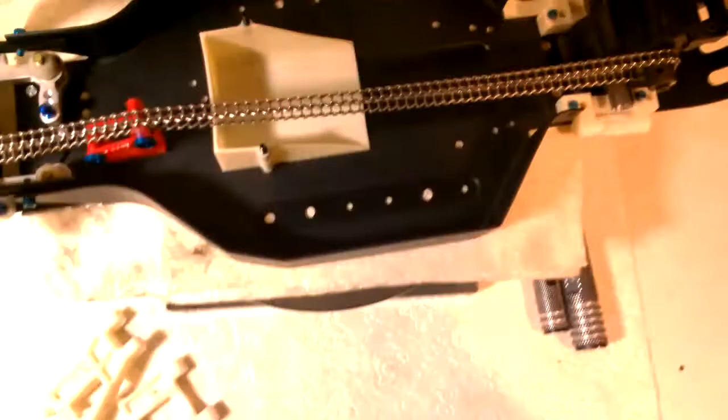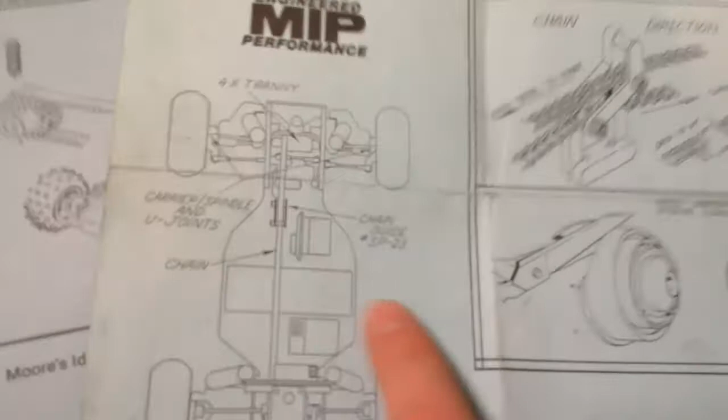In the original instructions, what it recommended doing is you put this chain guide here, it's like a tensioner, and you would end up running the battery widthwise across the chassis and then mounting the servo back over here. I had already done something kind of like this with my 410 Legend project.

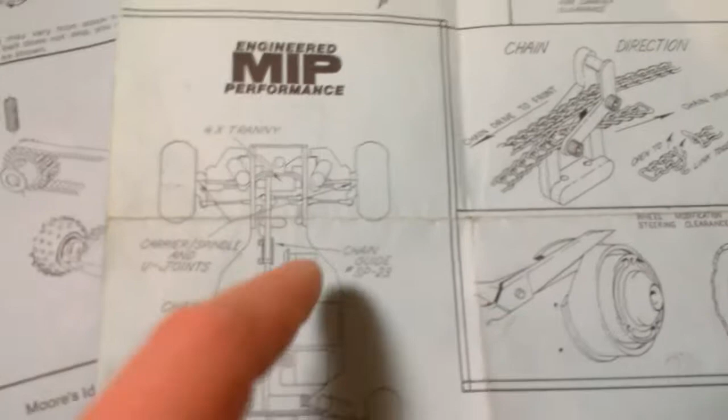So I wanted to do something different, and I wanted to try to run the battery in the original stick pack configuration. But in order to do that, you actually have to use this tensioner a little bit differently.

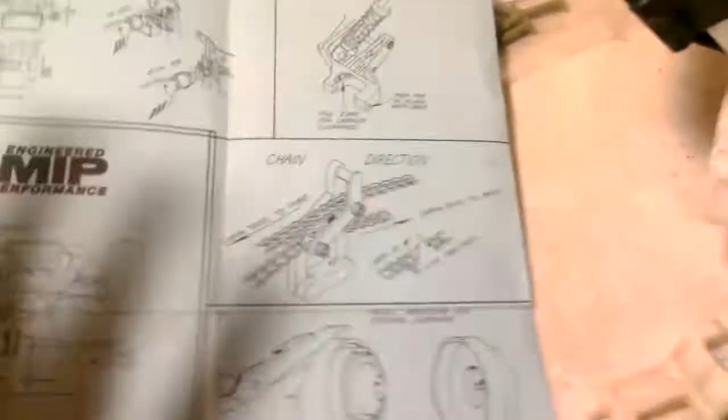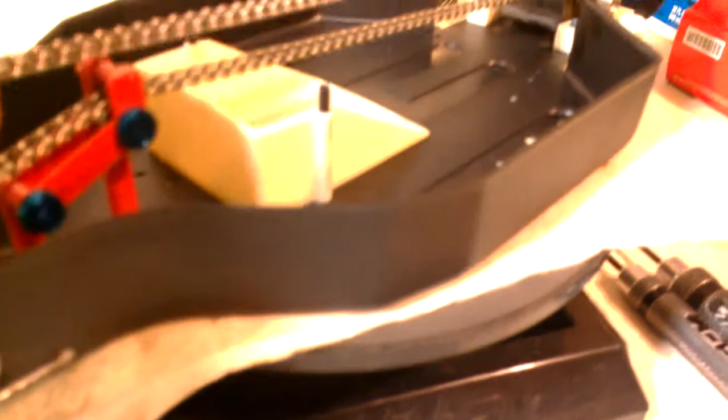Normally you would run the chain guide, call it tensioner, whatever you want, such that the chain itself goes, the bottom piece goes over this piece here and then under this top piece. The top piece here threads in between this top bearing and basically where this bottom piece is going right now. This top piece would otherwise go in, and then the bottom piece would go under that bearing on this guy here.

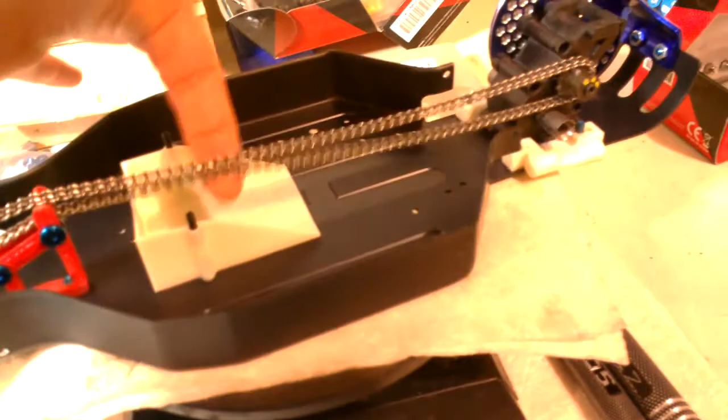But I moved these basically one notch up, so the top piece is on top and the bottom piece is on this top bearing, so that way I can lift up the bottom of the chain so that I can basically have enough clearance to run a stick pack configuration.

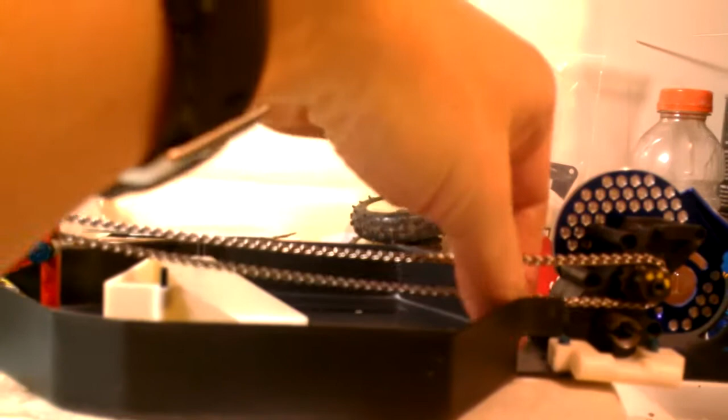And by the time I mount the bulkhead, for example, this will ride up a little bit, so I'd have clearance. I had two reasons for doing that.

One is that I did want to try something different from the original setup, but also I do have this nice MIP battery plate, and I want to be able to use it for one of my four-wheel drive projects. And since I couldn't use it on my Legend project, I want to try to use it here.

Which means running it this way. Now this does create some problems because there's basically now nowhere to put the servo. There's very little space here with the way the steering rack mounts. You do have to mount it back, and at full throw, it runs against these mounting holes.

So I can't quite put the servo here, can't really put it here. I was thinking maybe I could get a low profile servo and cut out the mounting arms and maybe tape it in, or maybe I can run it in a stand-up configuration over here. Maybe there's a way to actually make it work. So I'll play around with that and see what works best.

So that's sort of kind of where that is right now. Let's see, I think there was something I wanted to mention.

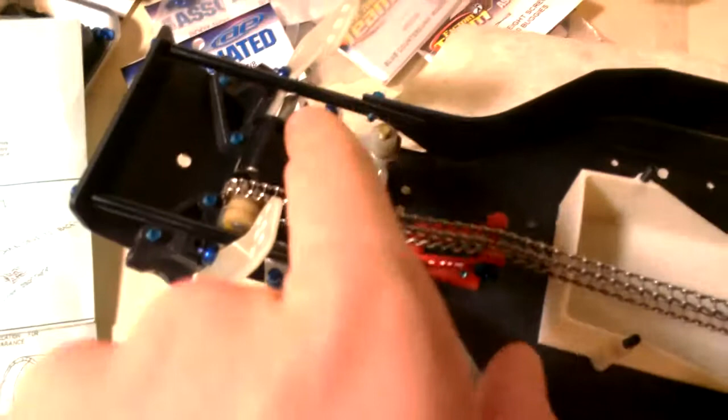You'll notice I am using the factory team blue aluminum screws and ball studs and nuts. I just did that to provide some kind of newish sort of look, a nice little blue accent to it.

One thing to point out, though, is that the blue aluminum screws, these guys here, are really soft. So if you actually do this, it's worth taking just some other screw, like a beater screw, for example, an 832 thread, and pre-tapping all of the holes before you actually thread these blue screws in. Because the head here is so soft, when you screw it in with your Phillips head screwdriver, it can actually distort the Phillips openings here, and it can look really monkey. So pre-tap all the holes first and then run this.

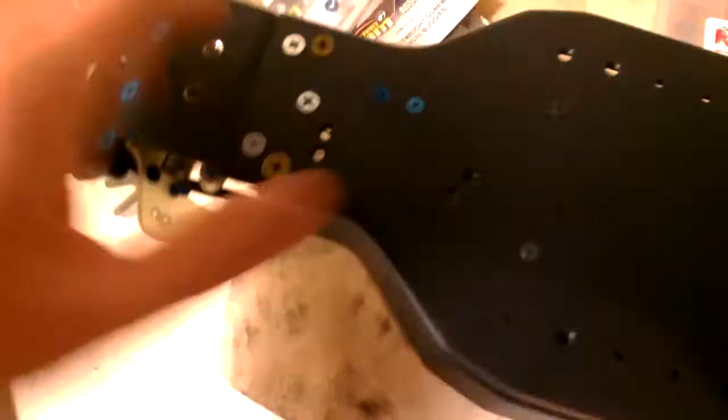Another thing to note, I had mentioned in the first video that I wanted to run my orange chassis with this, but because I had to drill holes for the tensioner, and I also did end up having to drill new holes for the steering rack, I decided to use just a re-released World's Car chassis for that. So it turns out that the front gearbox is a bit fatter than the 410 Legend gearbox.

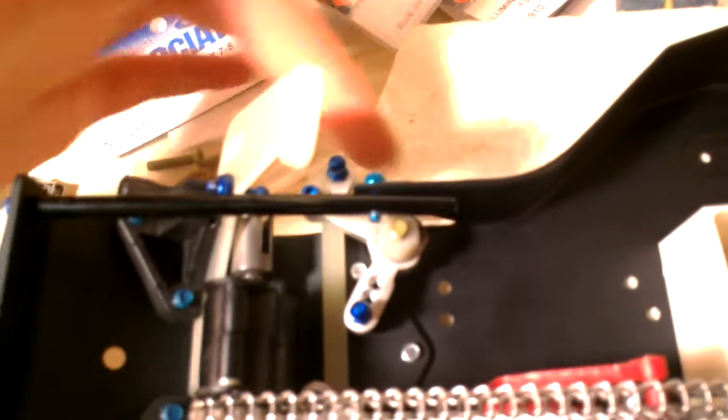In order to make space for that, you have to pull the steering rack back. The MIP 410 Legend steering rack didn't quite have short enough arms to fit that shorter rack with the stock mounting holes. So you have to drill these holes a little further back, and drill them out. And in order to account for the steering rack throw, you have to drill out or grind out this sort of triangular opening on either side, to let the actual arms from the steering rack throw all the way without hitting the chassis.

Now as a result of that, if you're going to use a newer front nose plate, this is a re-released front nose plate. Some of you may be able to tell the AE logo here doesn't have the curved typography that the vintage nose plate has, so this is a newer nose plate. The newer nose plates are already cut triangularly, they don't have a square or rectangular cut.

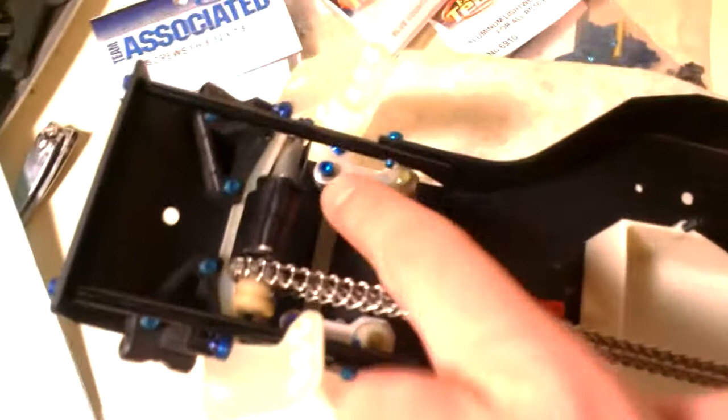What that means is with the older nose, let's see if I can find an example. So with the older nose, it would be perfectly square like this, and you would actually drill these two holes through both the chassis and the nose. But because this nose already has a V cut in it, you're only drilling these two holes through the chassis, and the new nose kind of gets around that.

So in order to mount the nose, you still have to use the 3 older mounting points, but you need to use shorter screws to clear the steering rack. You use the 832 by 1/4 inch flathead screws, part number 6931. You just use 3 of those, and that'll mount the nose just fine.

And then you just play games with using little spacers under the steering rack to lift everything up so that you clear the screws, and so that this cross brace here also clears the chassis. There's no rubbing or grinding or anything. What's interesting about this cross brace is that it doesn't pivot on bearings, it actually pivots on the threads of the screws.

So you screw in, say, this screw through the aluminum steering arm, and then it screws into this fiberglass piece here, and it just screws in and unscrews out as this thing sort of rotates around. So you have to make the spacing between the fiberglass piece and the aluminum piece just right, so there's not significant amounts of binding as this steering rack throws left and right.

One thing I also had to do with the length of screw I used here is put a small, I think it's a 1mm spacer on the top between the screw head and the steering rack, just to make sure that the bottom thread doesn't run into the chassis. It actually clears the nose plate here. This all seems to work okay, no problems. The actual screw head itself also does not run into the chassis.

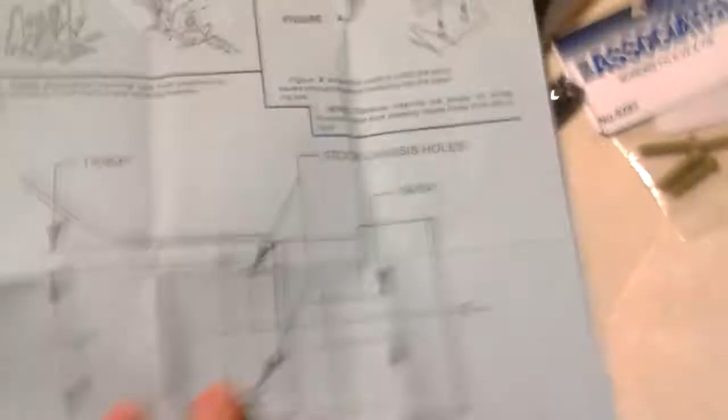This is an original front shock tower. It's just making sure you get your measurements right, especially with these bottom holes, because what you get is a template, and this is printed 1-to-1, so you could in theory just put this over the chassis and mark the holes. But the problem is you can't see through this, so you could maybe get some see-through kind of paper, or decal paper or something.

But I tried to do it with just normal white paper here up against the light, to mark off all the points. And then what I did is I put some masking tape onto the chassis, and I tried to make sure I got the holes lined up, because I can kind of see through this white paper. And then secure the paper against the chassis, and just poke holes through the mounting point positions and make sure everything's right.

And I'd make markings in the masking tape with a pencil, and then take the paper off, and I would just measure where those pencil markings were to make sure it's all symmetric. I didn't get it completely perfect on this side, I had to actually drill 2 holes, but I drilled small holes, so that way it kind of worked out.

I could just use my... whatever you call this, I forgot the name for this, but this is what you use to make angled cuts in the holes. It just kind of bored out those two small holes into one big hole with the countersinks in them. That's what it is, it's a countersink.

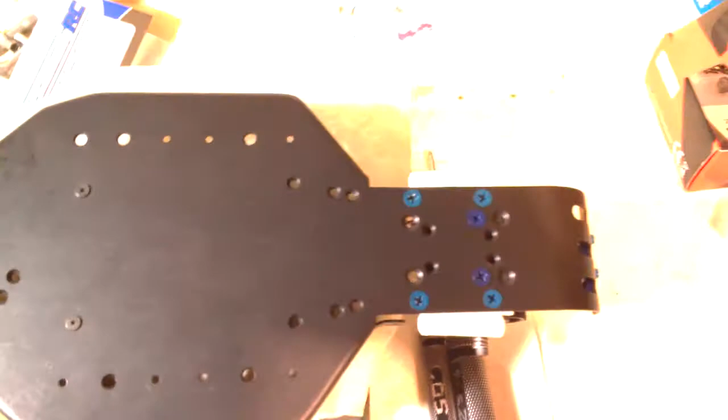The MIP gearbox that I'm using in the rear mounts using two screws, two 8-32 screws. It does not use the 4-40 screws. It's only two of these guys, and it doesn't use the standard length screw.

I think this is like a 3/8 inch screw. It uses, I think, a 1/4 inch - these two, I think, are 1/4 inch screws. Otherwise, if you try to thread a 3/8 inch screw in, it'll just get caught, and you won't be able to thread it all the way in.

And I actually sort of ruined two nice aluminum blue 8-32 thread screws that way. So then I had to go to a shorter screw to make this all work, so that's fine. Let's see, is there anything else I want to mention here? I think that more or less covers where I am right now.

Again, when the bulkhead comes in, I'll drill the hole through that, mount the chain through it. Then I'll work on the rear shock tower, and I'll work on the arms and everything.

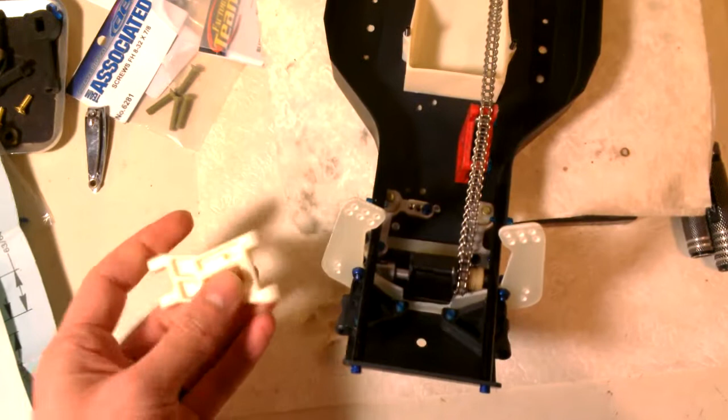One thing that might get a little tricky is the CVDs, and the reason for that is the chain drive kit did come with a pair of universals that were meant for the short arm RC10. Now I don't have those universals, and that's okay because I don't intend on running a short arm front. I intend on running the standard long arm front that you would find on a team car or a world's car.

But now I have to make sure that I have the right CVD for that. So I do have from my 410 Legend, if I go in here, I have these guys, these longer CVD dog bones that were meant for the long front arm kit. So I'm going to try to use these.

But the problem I have now is that between the left and right ends, one of the wheel axles is actually a B4 wheel axle that the previous owner put on. I only have one wheel axle that was original from the 410 Legend kit. So I have to play around and find CVD wheel axles that will fit in this assembly.

I did see some Associated TC3 CVD wheel axles that might be just the right size. I ordered those the other day, so we'll see how they fit. If they fit, then I'll just use this assembly. I won't try to play any games with using a different caster block and a different steering block like what I did with the 410 Legend.

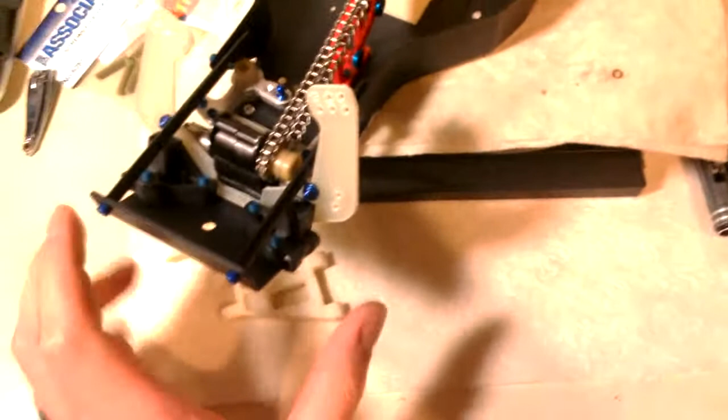I want to use the original MIP parts for this particular project here. So the front will hopefully not be a big deal if those TC3 units actually work.

If not, then I have to try a little harder and find another solution. For the rear, I'll probably keep it simple and just use standard RC10 rear arms, the standard rear hub carrier, and the World's Car CVAs. That way, I don't have to do anything silly to get that part of the drivetrain to work.

Let's see, yep, so I think that's it for now. In time, probably maybe a week or two, I'll have a little bit more progress done on this as the parts come in the mail.

So I hope you like it so far. I do like the blue accents. Hopefully this will look nice when it's all finished, but we'll have to see. So in the meantime, thanks for watching.